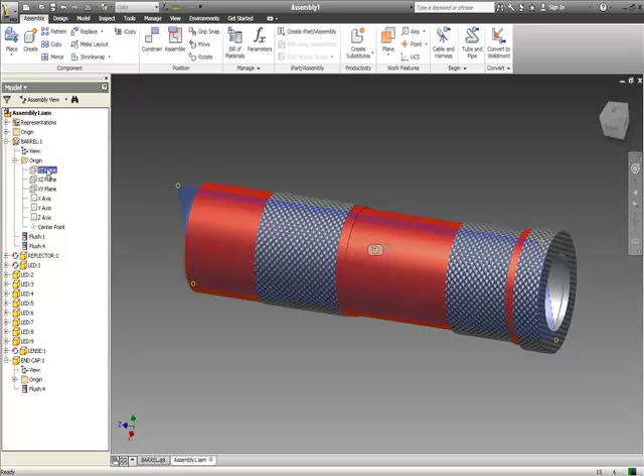I'm going to create a new part. Let me see how this is going to work. I'm going to open up the barrel and turn on its origin for a bit. I kind of want to work on that plane there, going right through the middle of the part. So I'm going to create, we'll call it switch cover, and it's going to go onto that plane right there, going through the middle of the part.

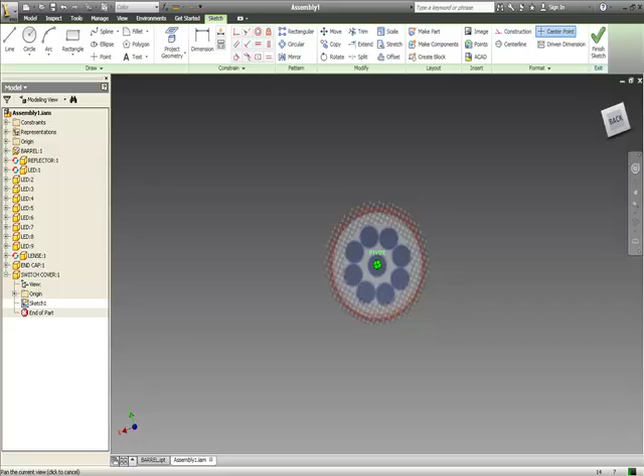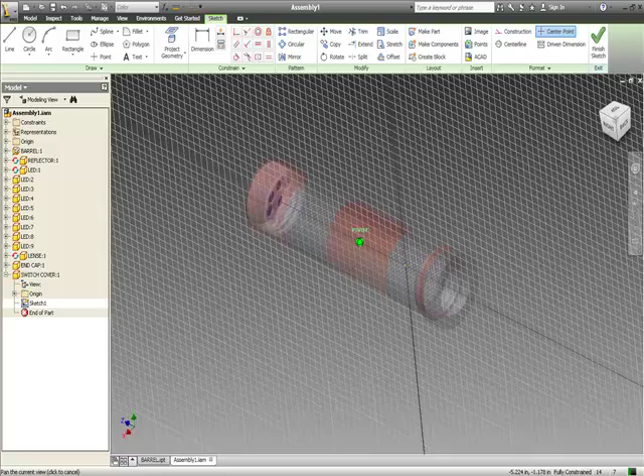Now if you hit F7, or right click and say slice graphics, it should cut off everything sticking out through the front of it here. I guess it doesn't because we're not in that part. So, here we go, we'll see how this works. This may not be a good strategy, but I was hoping it would.

So I want to project some geometry. I want that edge and that edge because that's the part it goes through. Maybe that little edge right there, that little edge right there. That's the part the switch has to fit through.

Again, I've got to figure out how much height I've got on the button. So I'm going to do a little bit of by-guess-and-by-golly measuring here. It looks like it has about a 40 thousandths dome in the center. So from there to there, this rises in the middle about 40 thousandths.

So I'm going to put a line out here parallel, and dimension that distance to be 40. D is dimension, so from here to here. Okay, that kind of works.

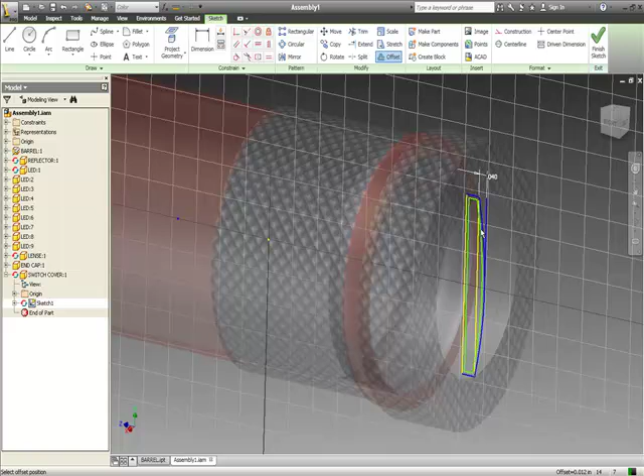I'm going to offset that to the inside if it'll let me. Ooh, that's not going to work. Let's see here, I guess I'll just do another 3-point arc here to here. And what it wants to do is pick up that same center point and make them concentric.

I don't want that. What I want is whatever this distance is here, I want the same distance in the middle, so they're more or less parallel to each other. It'd be interesting to see if it'll let me put a parallel constraint on it, make this parallel to this. I don't think you can make arcs parallel, unfortunately. I was hoping. How about equal? Make this arc equal to this arc. That works. Okay, so there I've got that profile kind of through the middle of it.

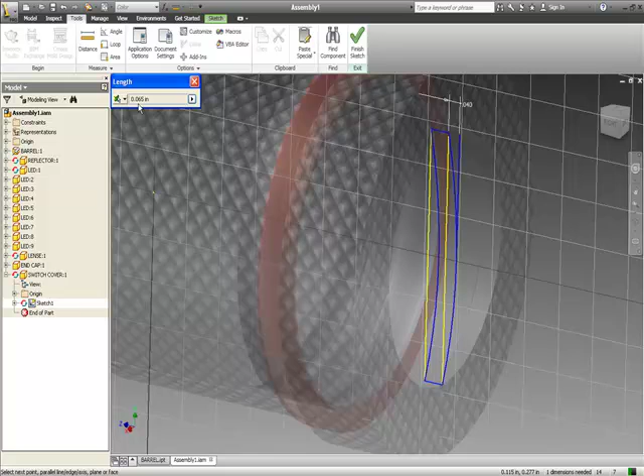And then it comes down some amount. It'd be nice to know what that distance is. So if I go to Tools and Distance, I should be able to pick up, there we go. It's 0.065. So I'm going to continue on here with some more lines.

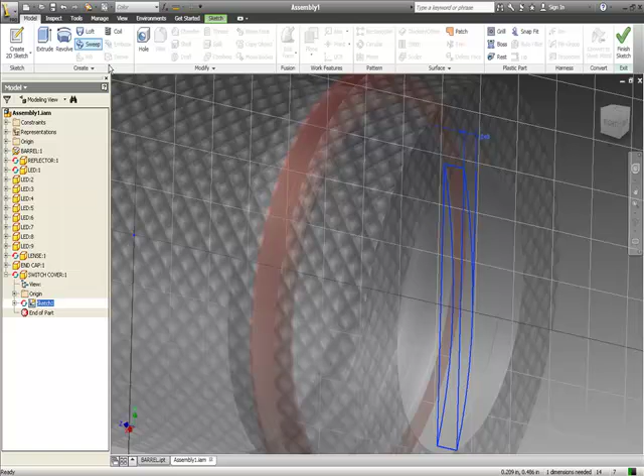Looks like I got out of the sketch. That wasn't my intent. No, I didn't. Okay, there we go, thank you.

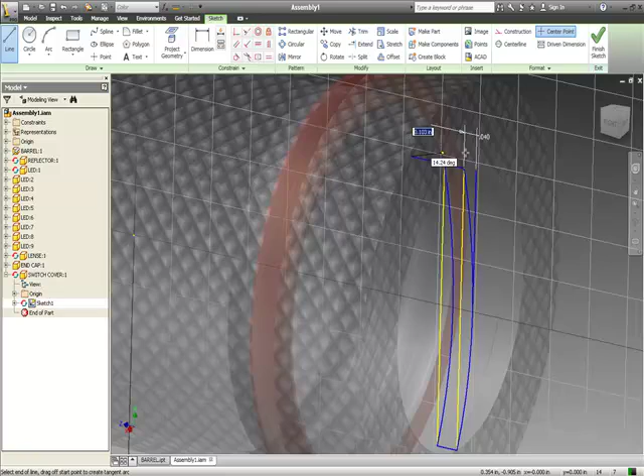Okay, so it goes down this way somewhere. I'm going to get right straight on here so I can see what I'm doing. Goes down somewhere. We're going to say it's a total of 150. That's from here to here.

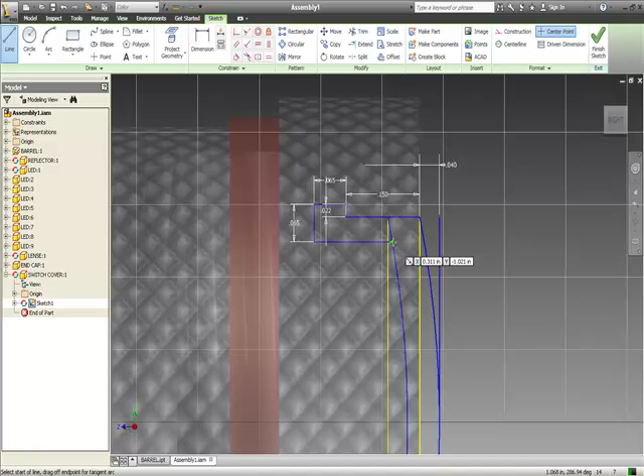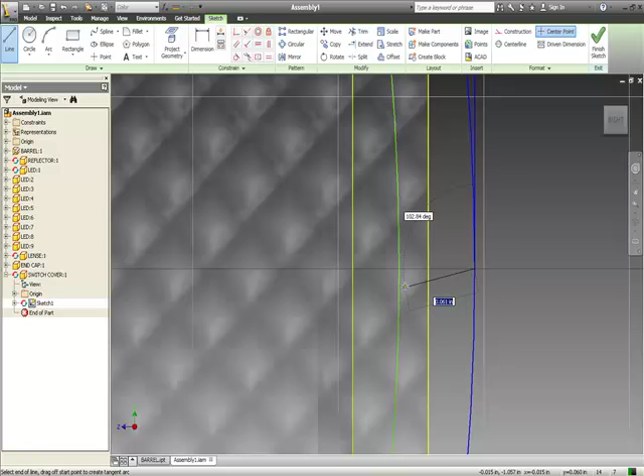Now if I hit X for trim, I'm going to trim out that little segment right there so that this is all included, and I need a line through the center from here to here. It's critical that you get those green dots to light up or something so we know that we found it.

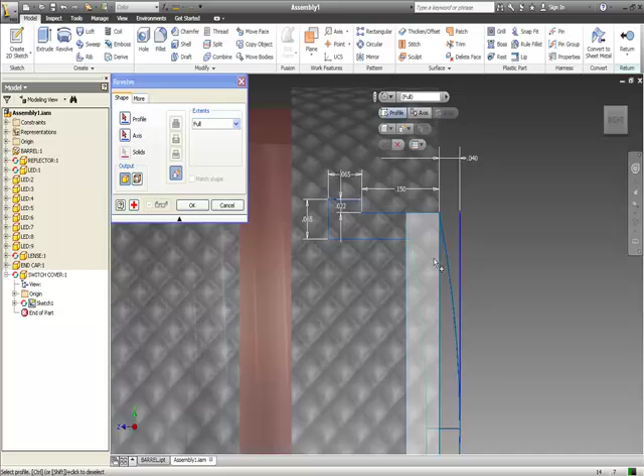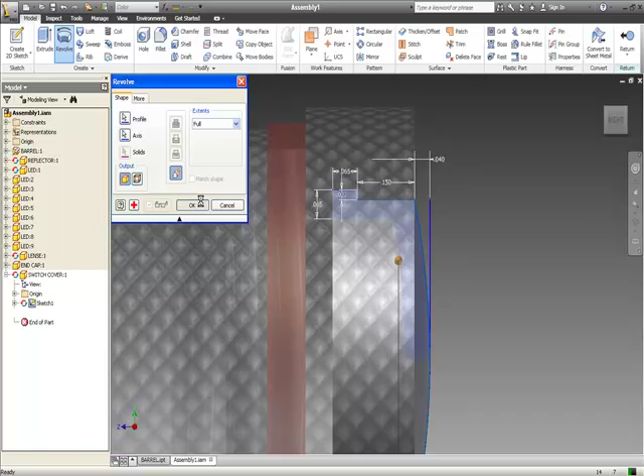There, now we're going to revolve that and have our black rubber button, I hope. Revolve, our profile is... doesn't want to pick it up. There it is, very good. There's the shape I was after. I'm going to revolve around all the way 360 degrees. Pick this end down here as my axis. And OK, and there I've got my button, I think.

Oops, wrong way. Okay, now that's black rubbery stuff, so black asphalt would probably look okay. I was going to see if they had anything in rubber. Yeah, they do, there's black rubber right there. So now this actually has a little texture on it. It's not a hatch, it's kind of a little button pattern. I don't think there's anything like that in there that I'm aware of.

There's some stuff you can mess around in here. You could, for example, tell it to make it out of stone. Understand that this is not applying the true property of rubber, it's simply coloring it, kind of like a painter would do. So you're not changing the physical properties.

If we wanted to go through and model this flashlight, figure out exactly what it's going to weigh, just playing up here in the colors isn't going to get us there. We've got to go in and actually change it to have physical properties of rubber, and then if the computer knows the density approximately of the rubber we're using, that's still a little bit of a generalization. It'd be a lot more precise in terms of that, and we could actually find out what this part's going to weigh. Why would that matter?

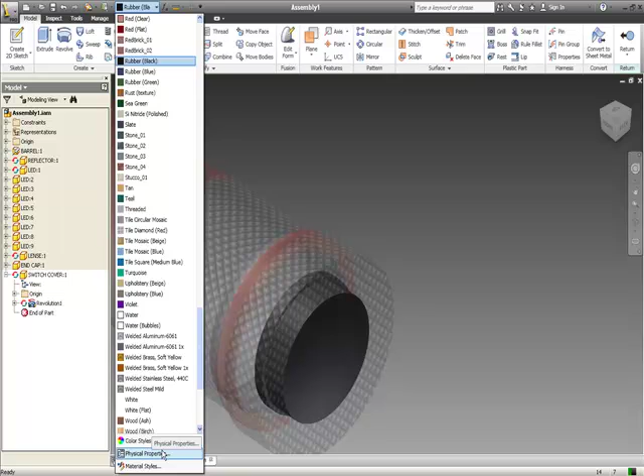Well, imagine if you were sending this to space, you're designing a flashlight for astronauts to take up, it probably matters a lot. If you're making it for somebody to put in their glove box, probably not very much. Someone's going to have it in their pocket, yeah, it might kind of matter how heavy it gets. If you made all these pieces out of something super heavy like brass, it'd certainly weigh a lot more. They're made out of aluminum and stuff like that.

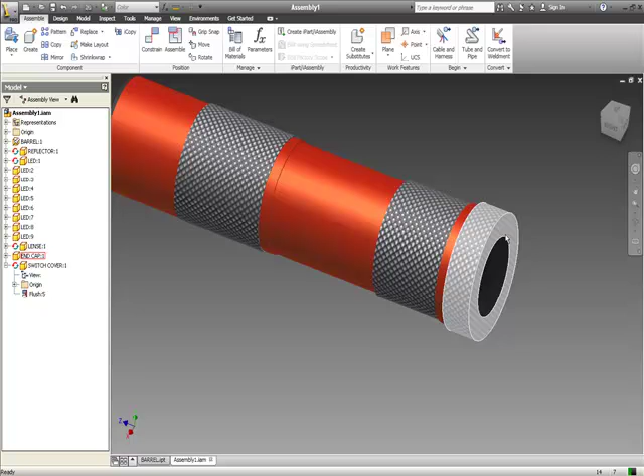Okay, I'm going to just go with that for the color. And now return, and I've got a button there in the back of my flashlight. It seems to me like my button should have stuck out a little further. I think I left out a little extra jog right in there. So I may go back in and modify that, but I'm not going to do it on the video.